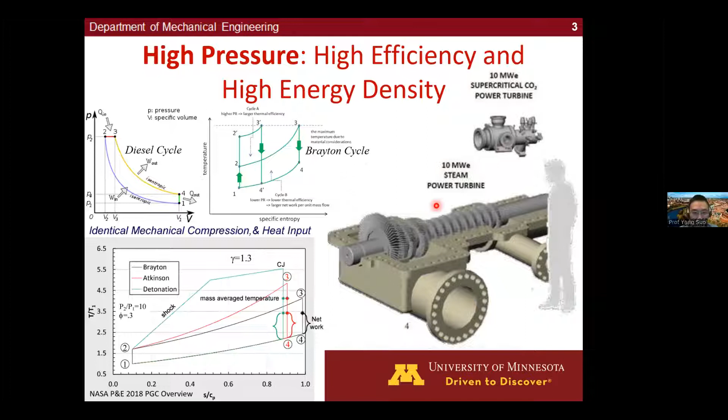As a very extreme example, that's a rocket engine. We know that a rocket engine needs a lot of power, and if you do not achieve high power density, you need a huge engine, which is very heavy, needs a lot of material, and it's impossible to push it up to space. So all rocket engines operate at very, very high pressure, something like this.

If you go higher, following the boundary between the liquid and gas, eventually you reach a point called the critical point. Above the critical point, you cannot tell the difference between the liquid and gas phase. They kind of become a similar thing. This is the so-called supercritical state.

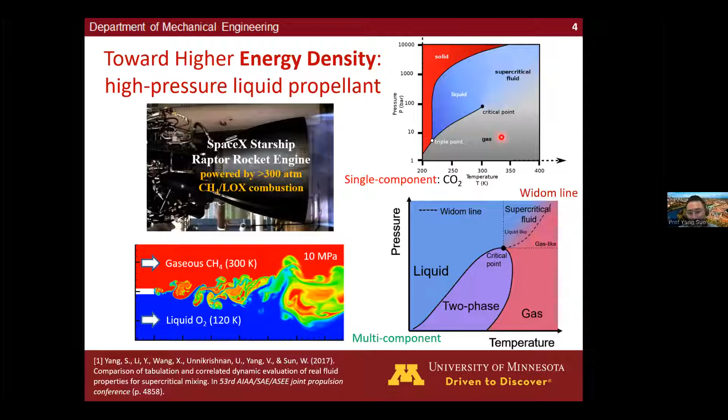Rocket engine, actually you don't need to worry too much. Rocket engine, the pressure is very, very high. Typically it's always supercritical. You don't need to worry about the transition between super and subcritical. But so we are talking about something else. The first example is the gas turbine jet engines.

So as you can imagine, you will inevitably go through a transition between supercritical and subcritical because you mix these two together. And if you want to really accurately simulate such a thing, you need one framework which can handle all the thermodynamic regions, not just say I can only handle supercritical or I can only handle subcritical. That's not okay. You need to handle all of them together in one framework.

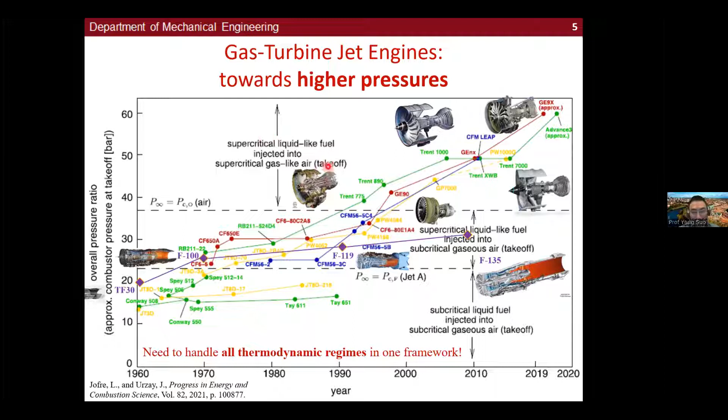If you look at the commercial one, this is a supercritical liquid-like fuel injected into supercritical gas-like air. Looks similar to rocket engine. Maybe we don't need to worry about the subcritical or transition. Everything looks like it's just in the supercritical region. But is that the case?

So I give you an example. This is not exactly the composition in the jet engine, but just an easy example for you. When you mix two supercritical fluids together, will the mixture still be supercritical? The answer is not necessarily. You might go back to subcritical again.

The reason is the true critical point could be much higher than each single component. And so when you mix them together, you raise the critical point, and suddenly your condition becomes subcritical and in the two-phase zone. And that can give you the so-called phase separation.

The most important observation I want to say here is a subcritical two-phase zone can be mistakenly recognized as a supercritical state if you use the traditional approach. What is the traditional approach? I mean the traditional approach for supercritical fluids, that's the so-called dense fluid method. Dense fluid method, basically the only thing you need to do is change the equation of state, change the ideal equation of state by the real fluid equation of state, and also change the transport property by the corresponding real fluid one.

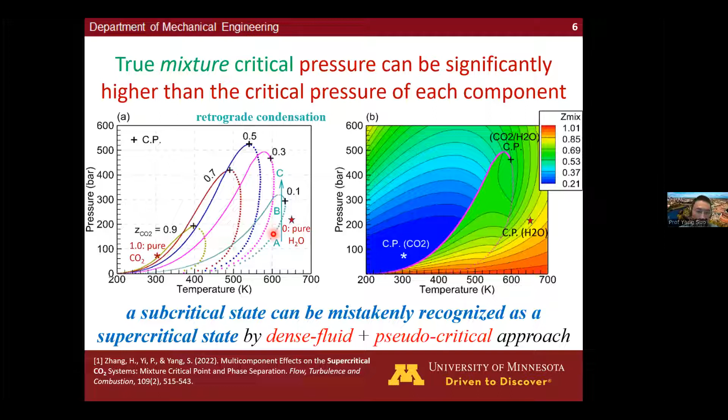And in those formulations, you will need a critical point to evaluate many functions. In the traditional method, what people do is the so-called pseudo-critical point, which is a simple kind of linear model to predict the mixture critical point. For example, if you use a linear model, the mixture critical point you will predict is here. The true one is here. So you can see it's very different. So we need this; this is one example.

The other example that may be interesting to many of you is the liquid fueled RDE.

This is actually an even better example, with more transcritical phase change. The reason is the residence time is extremely short because the detonation wave is extremely fast. Even though detonation gives you very high temperature in the chamber, the time is so short, not enough for the droplet to fully evaporate. So you'll have detonation wave collide with the shock. In the later example I'll show you, it's not just the shock that will collide with the droplet - the shock will not completely destroy the droplet or fully evaporate them. Very likely the droplet can survive to the reaction zone, and if that's the case, all these things can also be coupled with the reaction as well.

Another reason I said liquid fuel RDE might be an even better example is it has extremely large pressure and temperature variation. For example, this is recent news I heard from some friends doing MD - they indicated that the detonation triple point might have extremely high temperature, like 9,000 K and 2,000 bar. On the other hand, many regions of the chamber have very low pressure, very low temperature, relatively low temperature near the injection.

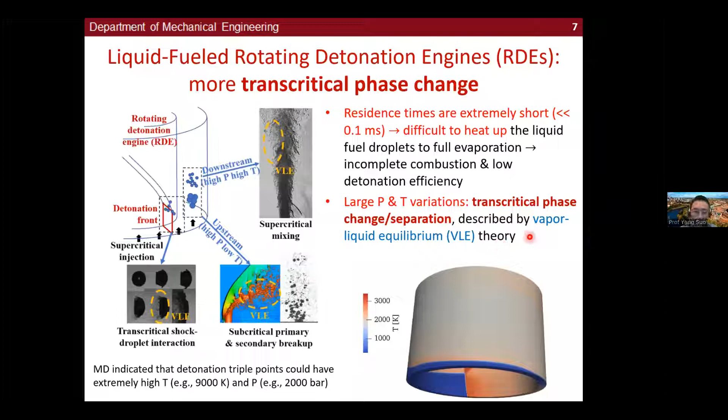So what is VLE? VLE is the foundation of everything we talk about with high pressure phase change, and the most fundamental VLE solver is the so-called TPn flash. How does this name come from? TPn flash is: you have a given temperature T, a given pressure P, and a given composition N. If all these are given, you can calculate the equilibrium phase composition.

How to calculate that? First, we rely on the real fluid equation of state, but we do this for each phase - we do not lump together the EOS for a mixture, we do this for each phase. We use the Peng-Robinson EOS. Based on this EOS, we can derive a very long formula for fugacity, and you can find that formula in our paper.

Fugacity and the fugacity equation is essentially the so-called VLE, vapor-liquid equilibrium. You can look at how the fugacity equation looks - very simple, right? Basically, for each component, its liquid phase fugacity should be balanced by its gas phase fugacity. That's essentially vapor-liquid equilibrium by its naming.

How to understand that? Fugacity - some of you may be familiar with it, some not. You can consider it as an effective partial pressure. When you have ideal gas, this is exactly partial pressure, but when you have a real fluid, it's an effective partial pressure. This basically says that the effective partial pressure of the two phases balances each other for each component. Fugacity can also be understood as a measurement of chemical potential and Gibbs free energy.

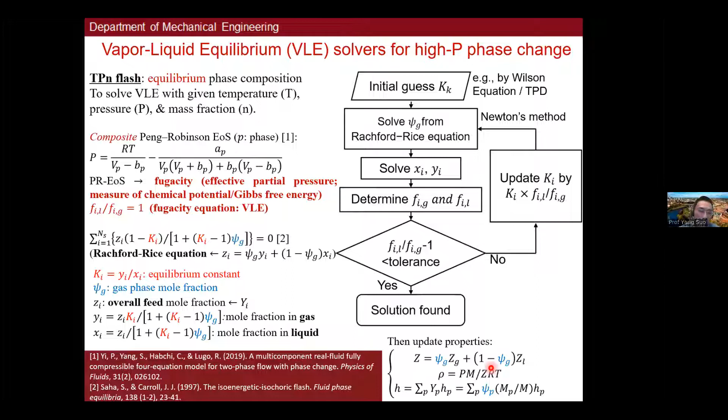So a natural question people have is - the series name is VLE, it has the name equilibrium, but is the equilibrium assumption okay?

CFD cannot tell you the answer, so we need to look into MD. I learned this figure from Professor Li Qiao's paper from Purdue. You can see the non-equilibrium process basically covers this, for example, the disappearance of surface tension and the transition for evaporation.

In such conditions, it's typically 1 nanosecond or several nanoseconds, much smaller than most CFD time step sizes you will use. For this reason, the non-equilibrium effect is negligible, and the VLE should be valid. As a result, the phase change is dominated by the slower diffusion process. This is also the case for the low pressure phase change model we discussed.

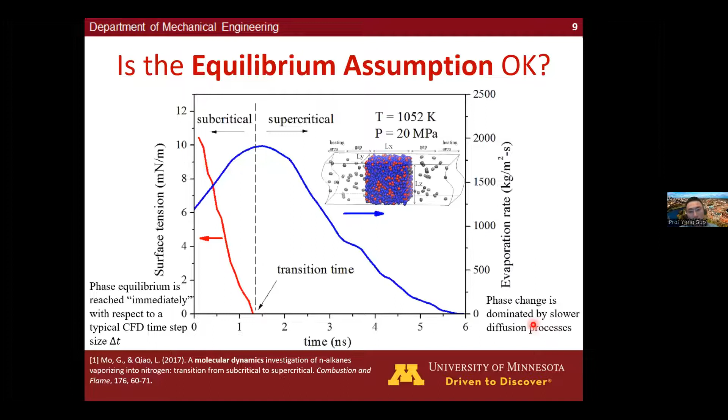Okay, so now we have the solver. Let's look at some examples, and we can use the TPN flash to predict the phase diagram for many mixtures. Here is an example adding a small amount of water to a CO2-methane mixture to mimic the SCO2 system. When you only have CO2 and methane, the critical pressure will be less than 100 bar. But if you add only 1%, you see how much the critical pressure is pushed up, and you can move inside the operating condition of the SCO2 system. If you add even more, you have a lot of overlapping, lots of two-phase zone and phase separation.

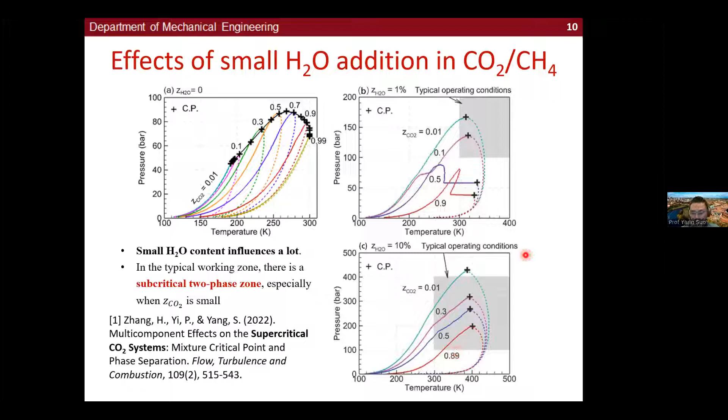We know that theoretically all the thermodynamic and transport properties are a function of the critical point, so getting a true critical point should be very important. But let's take a look at exactly how important they are. Here I use CP as an example. You see this one with VLE, this one without VLE. In certain regions, yes, it probably doesn't matter—that's why a lot of papers in the literature use the traditional way and it's still okay. But near the critical point, near the dome region, you can see they are very different.

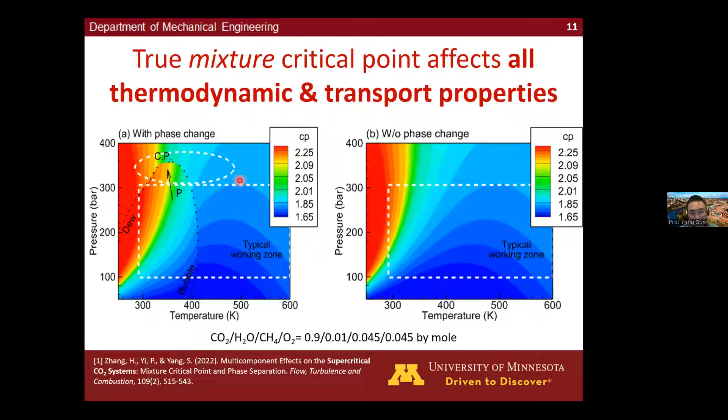Now I want to introduce a second VLE solver, which is HPN flash. TPN flash, which we already introduced, is the foundation of all VLE solvers—all other VLE solvers are essentially built upon them. HPN flash, by its name, is given enthalpy, pressure, and composition, rather than given temperature, pressure, and composition. That's why it's called HPN.

How to solve HPN flash is essentially to solve TPN flash, but you don't have T fixed, so you guess a T, solve TPN flash, and then check whether the results match your given enthalpy. If not, you update the T, and so on. Eventually you get the equilibrium solution for HPN. Roughly speaking, it's like that.

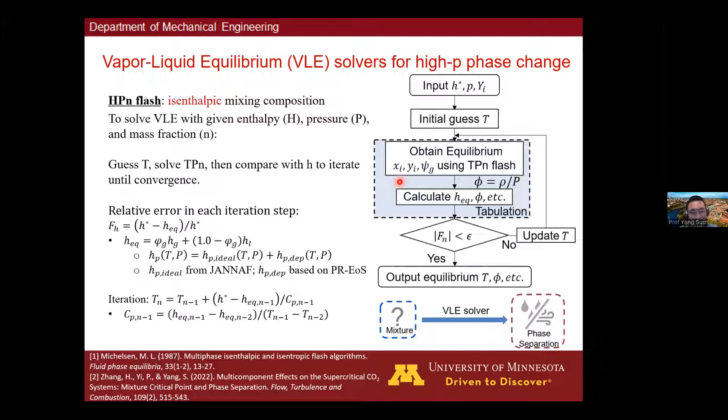Why do we need so many different VLE solvers? The reason is we're not just interested in thermodynamics—we're interested in CFD. This is a development we did based on the rhoPimpleFoam. It's a low Mach solver, but it has a transonic extension to allow it to simulate transonic conditions as well.

In a typical CFD solver, what you solve is the energy equation or enthalpy equation, rather than temperature—temperature is not what you directly get. So naturally, you need HPN flash rather than TPN flash. You give the enthalpy or energy, and let the HPN flash tell you what the temperature should be. TPN flash is used as a part of the HPN flash, so you can see there are many loops in the solver.

I want to emphasize that the CFD solver based on HPN flash doesn't mean enthalpy, doesn't mean isenthalpic. Isenthalpic is when this is fixed, but we use HPN simply because we solve the energy or enthalpy equation—we know the value, and then use HPN to provide the local instantaneous thermodynamics. It doesn't mean we enforce the process to be constant enthalpy. That's something many people get confused about, even reviewers, so I want to remind you here.

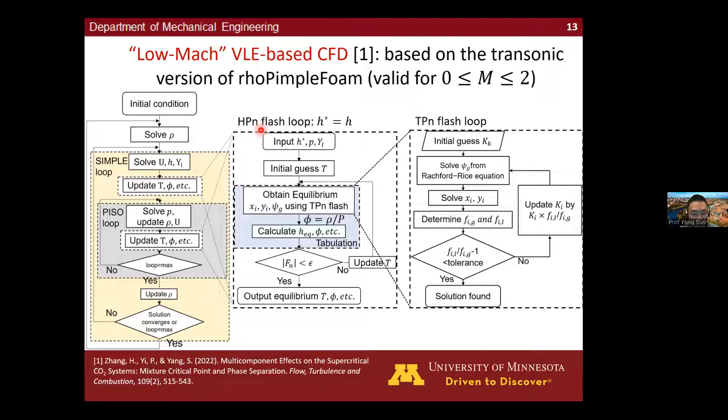Now we can see some examples. We use this CFD solver first to test an SCO2 shock tube. You have a shock wave going to the right-hand side and an expansion wave going to the left-hand side. What we found is for the shock wave part, the VLE didn't make much difference, but for the expansion wave side, you can see a clear difference between with and without VLE.

Okay, if you look at this, how much phase change do we have? It's just from 1 to about 10%, or a little bit more than that. We don't have a lot of phase change, just a little bit, but this already makes the density very different. You see the density with and without VLE become very different.

This is essentially because we have a partial condensation after the expansion wave. You trigger the phase change, you trigger the latent heat, so it also changes the temperature. So the point I want to make here is even a very small amount of phase change can have significant impact on the density or other quantities. So it's not negligible at all.

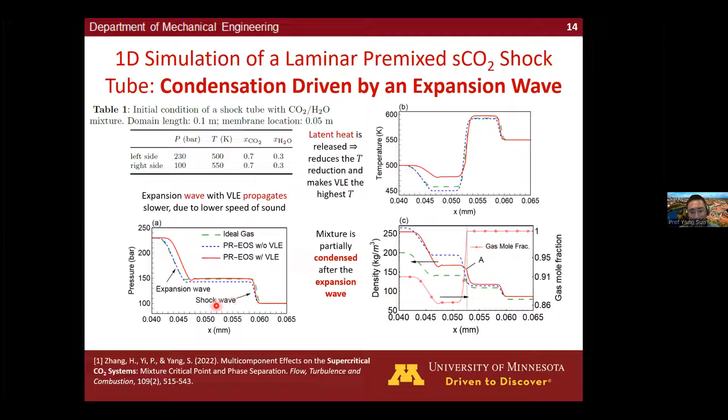Okay, and then we try to mimic the real SCO₂ system, so we do this jet-in-crossflow simulation. Essentially in the SCO₂ system, you have CO2 with a little bit of impurity water coming in, and you can inject methane or oxygen depending on which injector you are talking about.

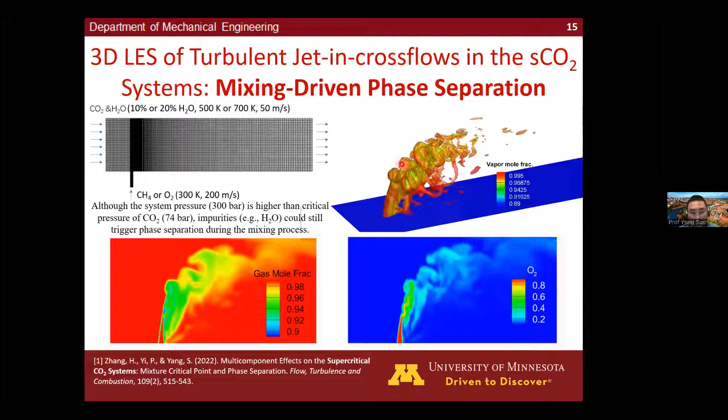And we can do a parametric study. The major effect is: the lower the temperature, the more phase separation you have. Phase separation - why I want to say phase separation here - because the inflow is supercritical gas-like, and the injection is also gas. But when they mix together, they trigger condensation, because you raise the critical point, you have the two-phase zone, you have phase separation. The lower the temperature, the more phase separation happens. The higher the temperature, the less phase separation happens.

And it also depends on which species you inject. Oxygen has a higher molecular weight, so the jet bends less, and it also has more breakup due to its higher density.

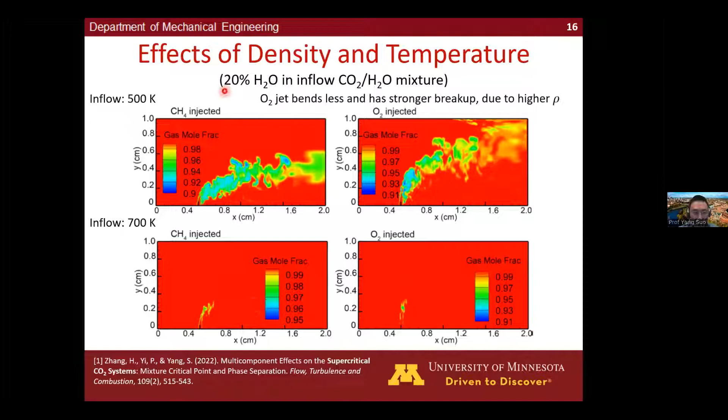If you compare this figure with the last slide, you can see this is 20% water in the composition, this is 10%. When you have less water in the composition, you have less phase separation. That's as expected. The different amount of water in the background flow can actually change your phase boundary, such that for the same trajectory, some give you phase separation, some does not, depending on the phase boundary. Here is the dew line.

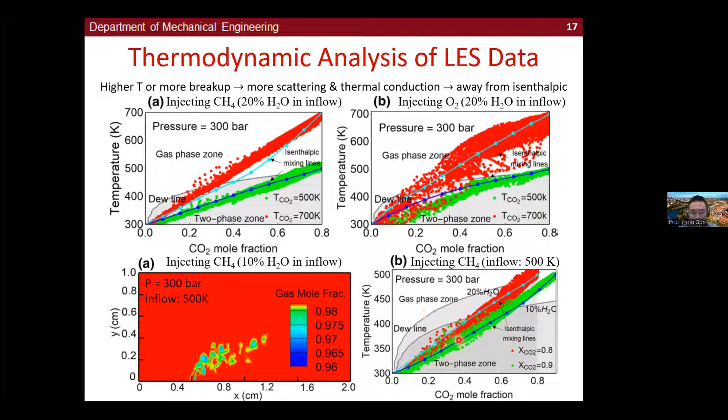So that's the example about the SCO₂ system.

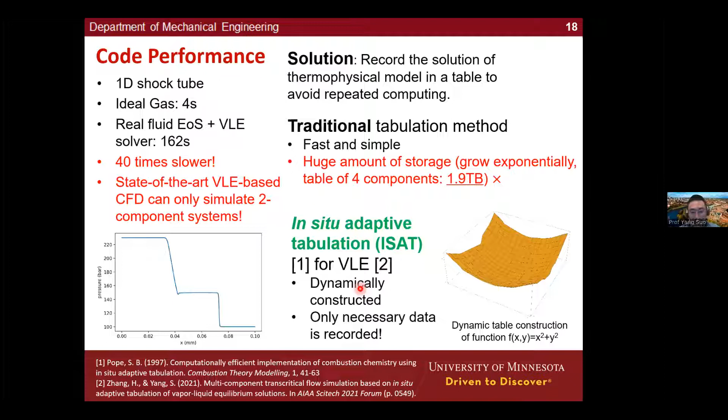So a natural idea - because we're from the combustion community, we are very familiar with the ISAT idea, which people use to do finite rate chemistry. So why not also apply it for VLE calculation? We can dynamically construct some table, and we only do calculation when necessary. We want to avoid all the repeated calculation.

So we apply ISAT to the PHN flash solution, and in ISAT you have a mapping, and the X in for the VLE solution is pressure, enthalpy, and composition - that's PHN - and the output is temperature, density, and phase mole fraction. And in the ISAT, a record in the table needs to have X0, Y0, and a gradient. The gradient you can evaluate numerically, and you can also evaluate it analytically.

We learned the derivation from Suresh Menon's group. They did a lot of derivation for how to do analytic evaluation for the gradients in the VLE solution.

In the VLE, in the ISAT approach, you basically build a so-called ellipsoid, or region of accuracy, and any point that falls into this region, you can do linear interpolation to get the value rather than doing an on-the-fly calculation. You store all the data in a binary tree like this.

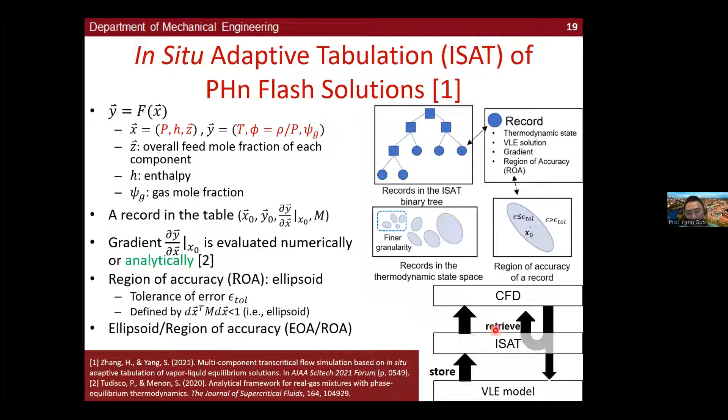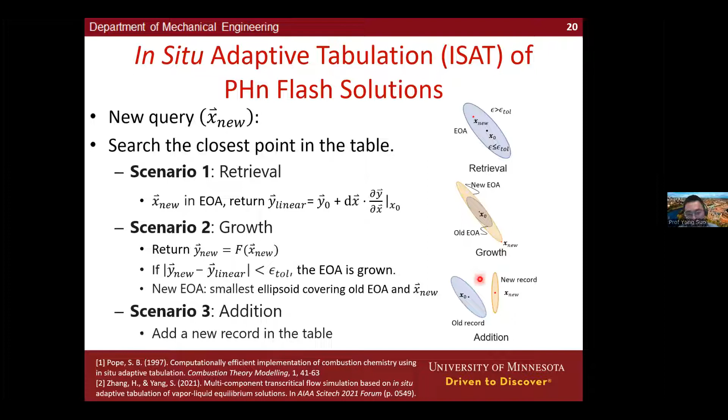This is more information about ISAT, some of you may already be familiar with it. If a new point falls directly into the region of accuracy, you can do linear interpolation. If a new point is outside it, but the accuracy of linear interpolation is still good, you can grow your ellipsoid. If neither is the case, you need another VLE calculation, so you add another ellipsoid. That's how it works.

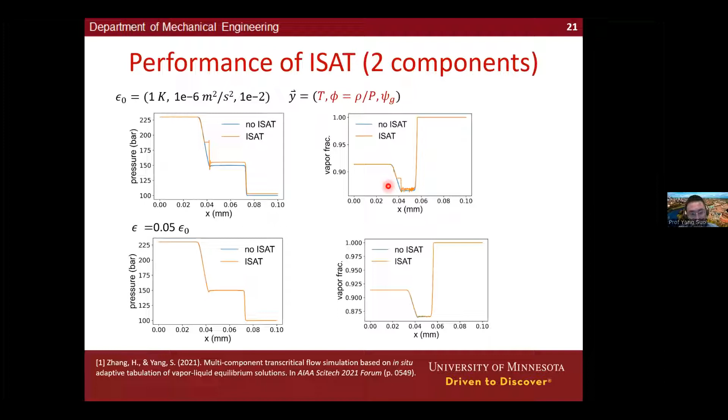The threshold matters. Here we show some examples. If you have too large a threshold, you will introduce errors, but if it's small enough, you will get very accurate results. So you need to consider both acceptable accuracy and fast enough speed.

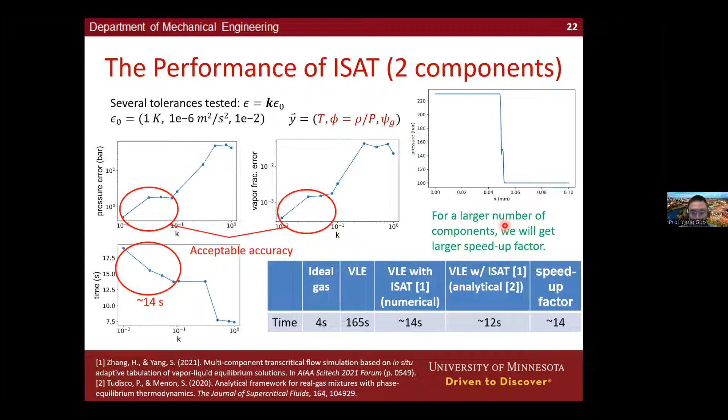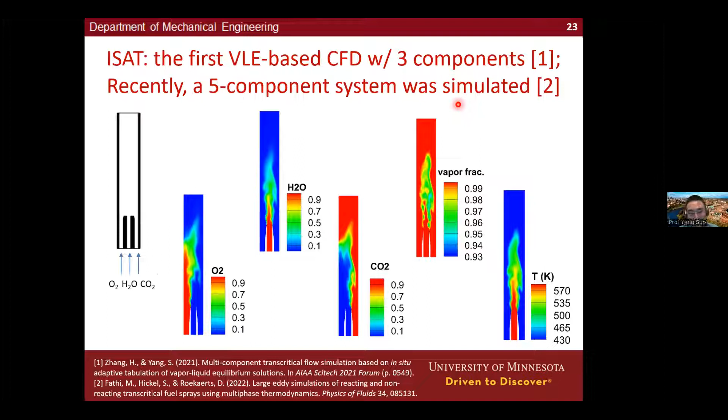Here is the example case we did, with 3 components. I think this is the very first 3-component case, since we never saw it in the literature, and we can do it pretty fast. I want to mention recently another paper was published in Physics of Fluids where they did 5 components, so we are not the only ones doing more than 2 components now - there are other groups too.

All the previous results were from the low Mach solver. For other applications like detonation, you can have more than Mach 5, and you definitely cannot use that solver. So recently we also coupled the VLE with a fully compressible solver based on the rhoCentralFoam, which uses the central upwind scheme.

In addition to coupling the VLE, another issue is that for a fully compressible solver, if you do supercritical or transcritical flow, you will have spurious pressure oscillations. There's already some method to handle that, for example this double flux model, so we coded this up together with the VLE.

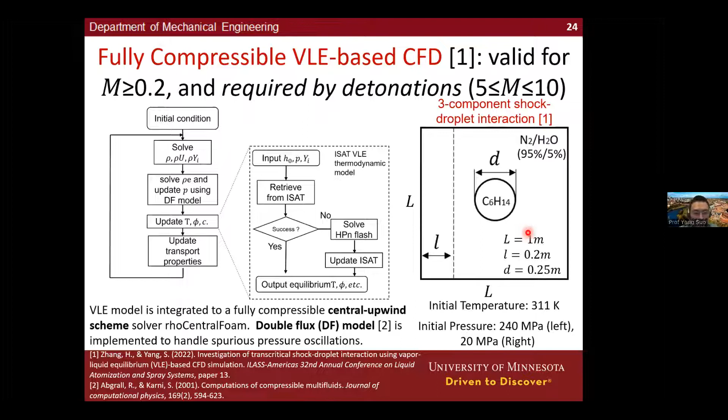An example case we are doing now is not yet detonation - we just want to look into a simple case first: a shock-droplet interaction, like this. This is the simple case we simulated very recently.

When the shock collides with the droplet, you raise the pressure and push the condition from subcritical to supercritical. It's not directly visible from just the vapor fraction, but you can probe the data here and map that into the thermodynamic regime diagram to tell whether it's supercritical or subcritical.

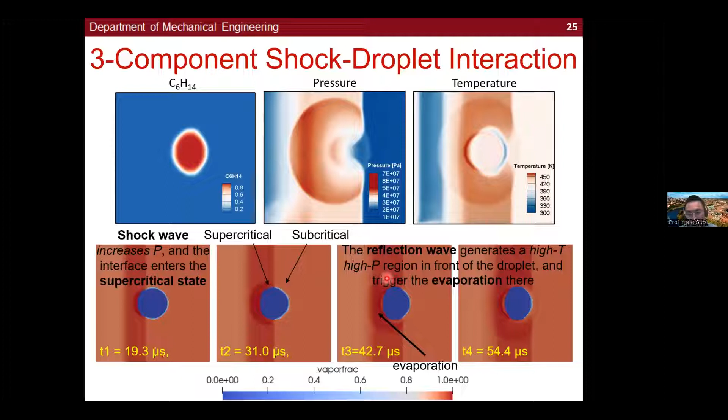Another thing is you have a reflection wave, which triggers a high temperature, high pressure region here, and this is the major region for evaporation. We tried to see how much evaporation actually happened.

A simple way to do that is you do a VLE solution, then another CFD without VLE, and you can see the difference is only 6%. That means the shock wave is probably too fast for significant phase change - it collides, then moves away too fast, so phase change is a bit slower, and only this amount happened.

But that's not bad news scientifically - that means very likely, if it's a detonation, the droplet is likely to reach the reaction zone, meaning you'll have VLE interaction directly with the reaction zone. Scientifically that's more interesting, and we do plan to investigate that.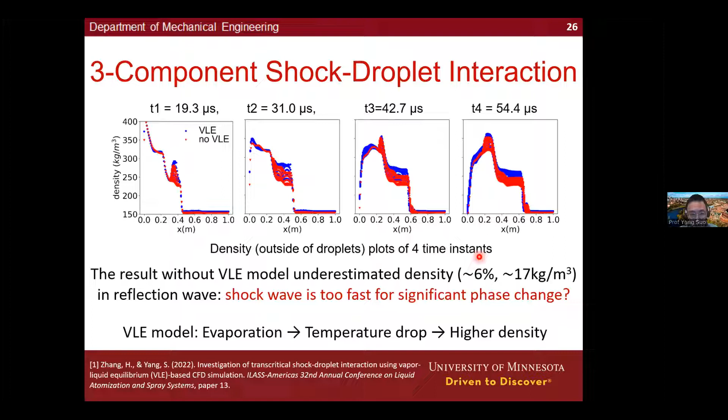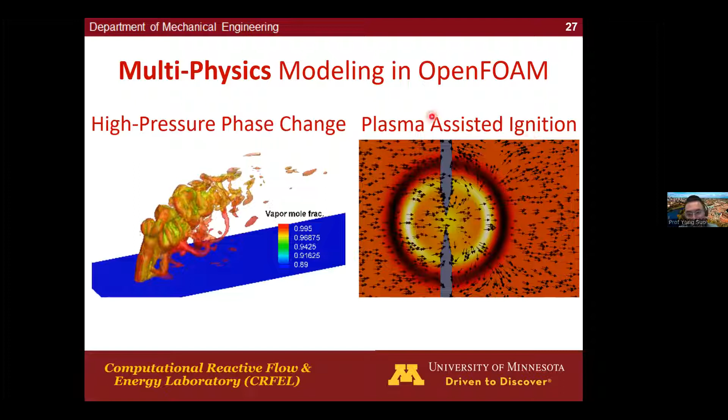That's the first half of my talk about high pressure phase change. To save time, let's go to the next topic about plasma assisted ignition.

The first recent project we did is about plasma assisted ammonia combustion. Why ammonia? Because it's carbon free and likely to give clean combustion. Ammonia can be renewable, and it's indeed carbon free.

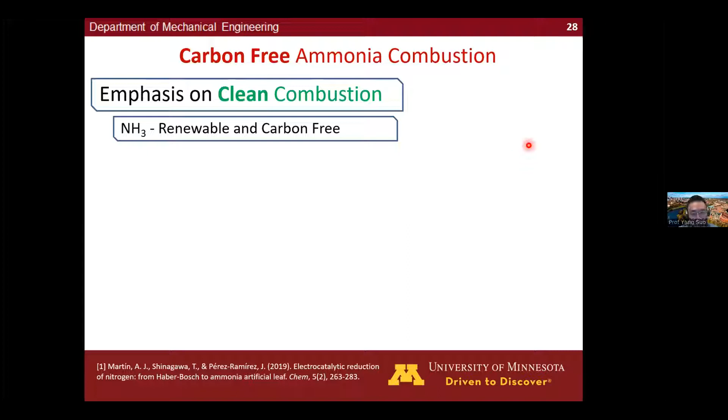Traditional ammonia synthesis is by the Haber-Bosch process, which is not renewable and requires a lot of machinery - that's the major way nowadays. But today a lot of new methods are coming out; you can even just use air and water to synthesize ammonia using renewable energy like solar or wind.

The energy density of ammonia is pretty nice, similar to gasoline - it's like half, not an order of magnitude difference. A battery is an order of magnitude lower than gasoline, but ammonia is pretty nice. It's an effective hydrogen carrier, and it's safer and easier to store or transport than hydrogen.

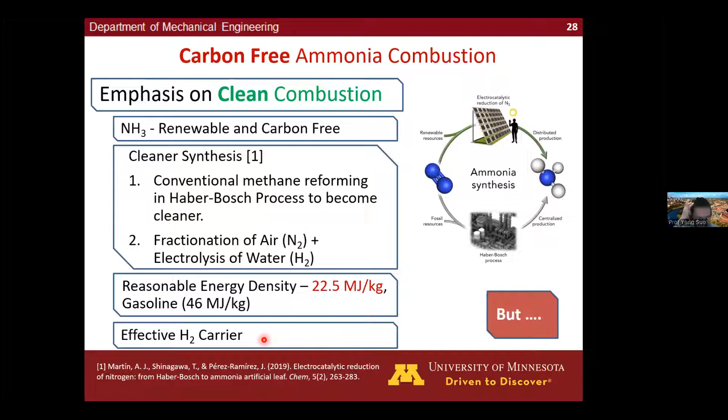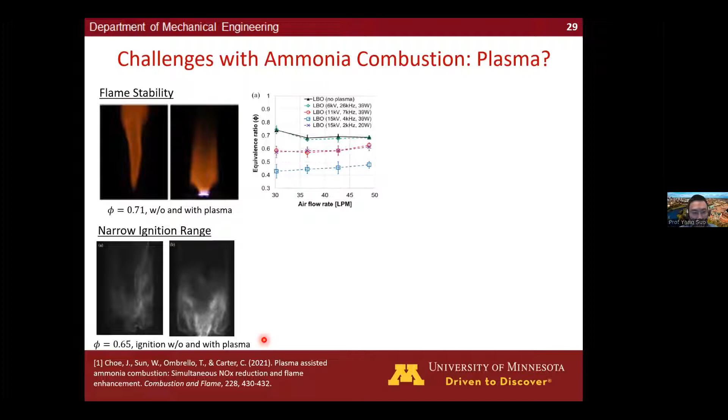But ammonia has many disadvantages. Its flame stability is very bad, and you can very easily get lean blowout. It has a very narrow ignition range, and it's very hard to ignite ammonia, and it gives you a lot of NOx.

Recently, Professor Wenting Sun's group at Georgia Tech did this experiment. They basically added plasma to a swirling combustor. They found that they can extend the lean blowout limit for ammonia flame, and they can also make ignition easier.

And most surprisingly, they found even NOx can get reduced by plasma. That's a surprise. Why is it a surprise? Because normally for other fuels, plasma will increase NOx by enhancing the oxidation of nitrogen. But for ammonia, somehow it reduces NOx.

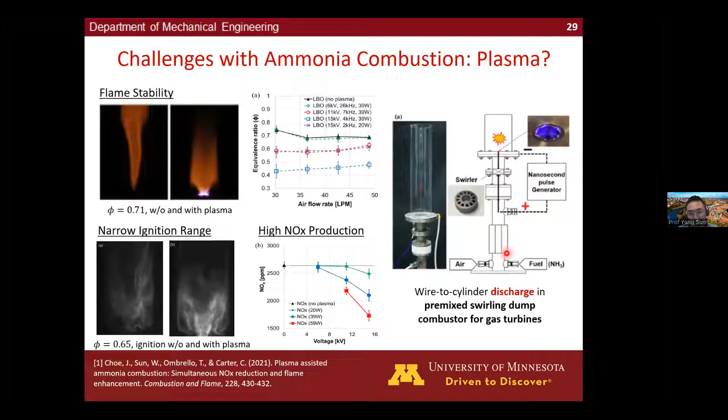The thing is, experiments can observe it, but cannot tell you why. So the job comes to my group. We will eventually simulate their device, but to do a parametric study, let's start with a 0D simulation.

The 0D simulation is very simple. Basically we couple ZDPlasKin to simulate the nanosecond discharge and use ChemKin to simulate the gap between the discharge pulses. This is exactly the same as what Professor Yiguang Ju's group did before. The ChemKin part everyone's familiar with.

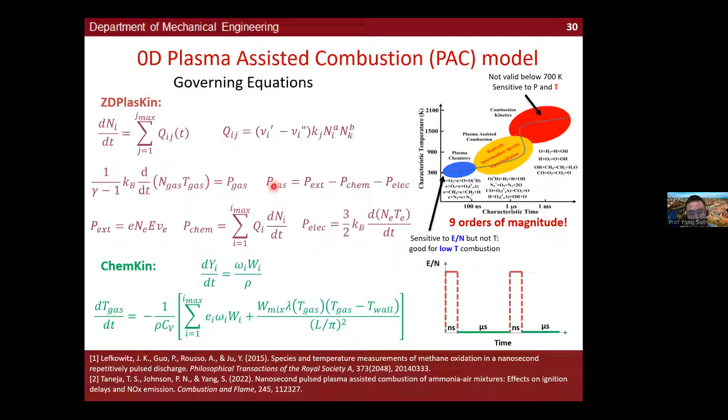The ZDPlasKin part still has species equations, but for plasma species, and this is the energy equation. You want to know how much heating this plasma gives you. So you have the externally enforced power, and you want to calculate how much of this goes into the plasma chemistry, how much goes to accelerate electrons, and the remaining can become heat. That's how ZDPlasKin works.

We use this tool to do a parametric study for plasma-assisted ammonia combustion, and indeed we find the same observation as the experiment: faster ignition and lower NOx. Faster ignition is as expected - we get an order of magnitude faster ignition. This was one of the original motivations for PAC, to make scramjet ignition easy.

One interesting thing I want to say here is plasma is not the only way to give fast ignition. If you do the same high frequency pulse but using laser, you can give pretty similar fast ignition. But traditional spark ignition will give you much, much slower ignition.

On the NOx side, the story is different. Only plasma can reduce NOx. Laser ignition gives exactly the same amount of NOx as spark ignition - no benefit.

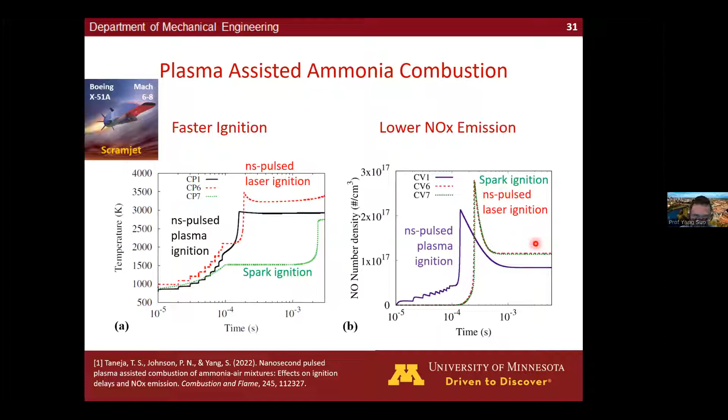Simulation can give us all the information, so we try to understand what's going on. For ignition, it's quite easy to understand, just like hydrocarbons. Plasma can give you much faster generation of OH radicals. Laser can do much faster than spark, but is much slower than plasma, because in laser, all the energy goes to thermal energy, while in plasma, a significant portion goes to chemistry. O1D is a very active, excited state of the O radical.

Spark ignition will not give you any O1D. Laser can give you a little bit, but plasma is the major one that can give you O1D. The reaction is electron plus oxygen gives O plus O1D. O radicals perform similar to OH, as you can see. So it's very easy to understand why plasma gives faster ignition and why laser can also give faster ignition - both are much faster than spark.

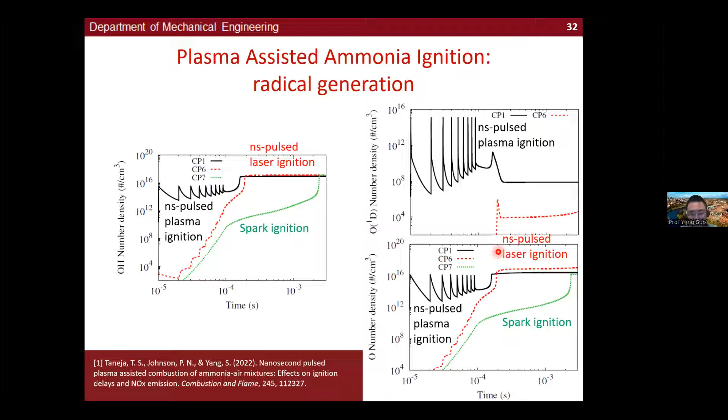If we look at the path flux diagram, we can see one big difference: for plasma, the major generation of OH comes from O1D, while for laser and spark, it all comes from O. The reason is the major reaction, electron plus O2 becoming O plus O1D, is not there in laser or spark because there's no electron in these two.

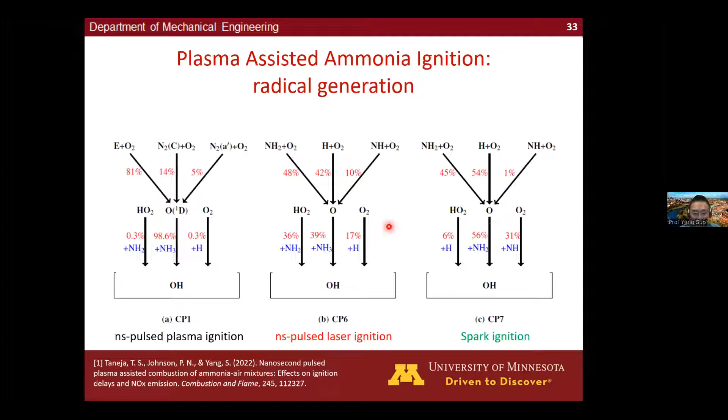Now let's look at NOx reduction. Why do we have NOx reduction? During the pulse, the path flux analysis looks like this. You can see the plasma case actually pushes everything towards nitrogen. So plasma essentially reforms NH3 to NH2 and eventually to nitrogen and hydrogen. Laser and spark mainly still push it towards NOx.

In addition, laser and spark are actually not very active, not very reactive during the pulse. So what you can see is the total amount of ammonia is almost constant for laser and spark, but drops significantly for plasma, because plasma reforms it into nitrogen and hydrogen.

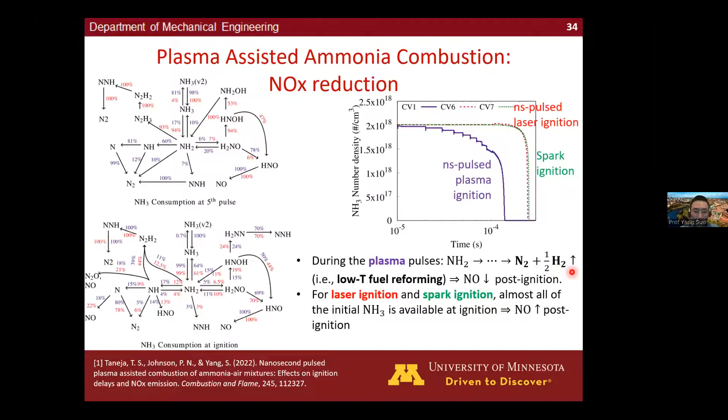So when you get ignition, the plasma case already has a very limited amount of ammonia, so the amount that can go to NOx becomes limited. But for laser and spark, they have almost the same amount as the initial state, which gives you a lot of NOx. If you look at the ignition, actually all three are very similar, not much big difference. The major difference is during the pulse, plasma already consumes a lot of ammonia to reform it into nitrogen and hydrogen.

Okay, so that's about ammonia, and we did a 0D parametric study. But this is an OpenFOAM webinar, so we are more interested in CFD, we want to go towards CFD. But it's very hard to do CFD for PAC because we have coupled physics, and more importantly, we have a very wide range of timescales.

The discharge and plasma timescale can be 10 to minus 13 to 10 to minus 8 seconds, while combustion kinetics and turbulent flow is normally 10 to minus 6 to 10 to minus 4. So this is like 9 orders of magnitude difference.

Okay, so we want more physics, we also want affordable CFD, so these two contradict with each other. There are several solutions. First, we want to do a very detailed plasma part but ignore everything else, so it's the 0D solver. That's what we did for the ammonia case.

The other way is we want a little bit of dimension and fluid, so we can make it 1D. That's my PhD work at Georgia Tech. You can also extend it to 2D to do some laminar flow discharge. There's some paper about it, and it's very expensive - you cannot do 3D, you cannot do turbulent case. 2D laminar is the best you can do.

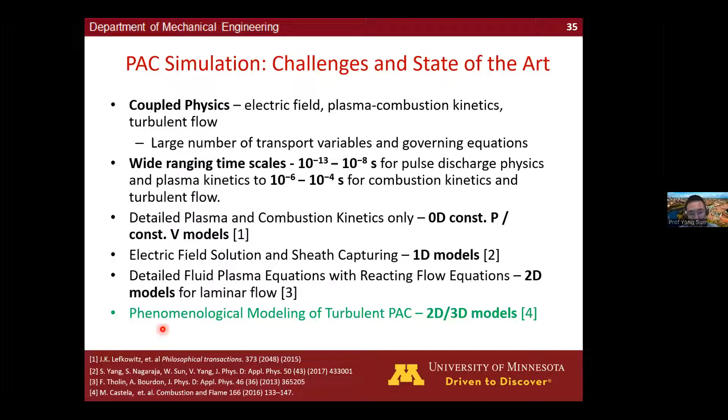If you want to do 3D and turbulence, currently the only feasible way is the so-called phenomenological model. This phenomenological model was invented in France, at EM2C, central Paris. The basic idea is a little bit similar to the 0D model. For the input energy, you can distribute it into 3 parts: the ultra-fast dissociation of species, ultra-fast heating, and the vibrational excitation. The vibrational excitation will eventually relax to translational energy, which gives you the slow heating.

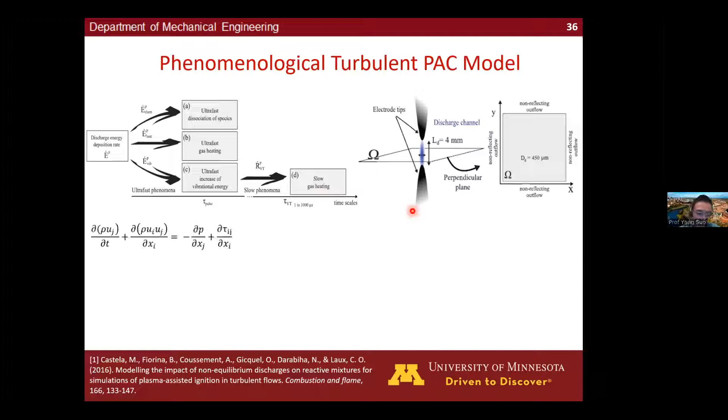Okay, so the governing equations - we still have the Navier-Stokes momentum equation, we have the energy equation, but you have more terms to represent the enthalpy change from the plasma chemistry, the fast heating, and the slow heating from the vibrational to translational relaxation. To capture this VT relaxation process, you also need to introduce vibrational energy, and this is the source - the plasma gives you vibrational excitation. This is the sink - the VT relaxation gives the sink. And of course the species equation, but you need to add the plasma term.

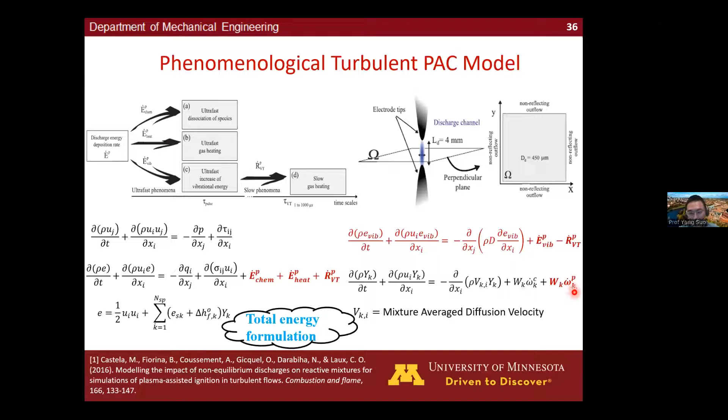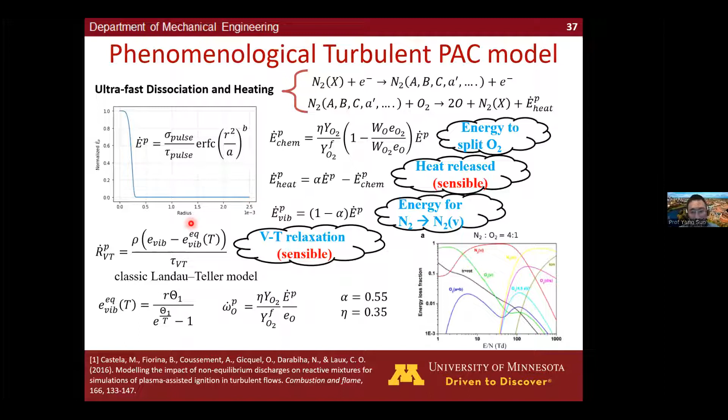Okay, so we have more details here, because of time I probably won't talk too much, but one thing I want to mention is this phenomenological model assumes a waveform for the power density. You basically need to give a power density as an input file to the code such that this phenomenological model can work. And they assume this power density function does not change with time, which later I will show is often not the case.

Okay, so we basically developed this model. The model is not invented by us, that's from EM2C, but we developed it in OpenFOAM. Just like the VLE solver, we did both the low Mach version and the fully compressible version, based on rhoPimpleFoam and rhoCentralFoam. Okay, and one thing is the molecular transport becomes important.

So the default OpenFOAM uses unity Lewis number, unity Prandtl number assumption, so we coupled Cantera to provide the detailed transport property. Cantera also gives us CVODE to handle the stiff chemistry. And by the way, our Cantera coupling is already posted on GitHub - anyone can go ahead and download and use it.

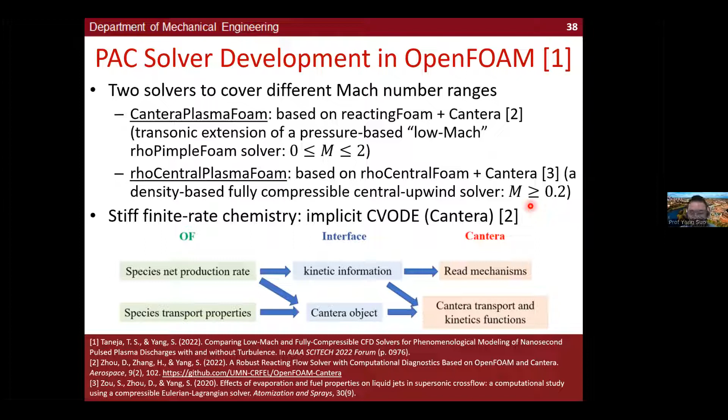So with the solver, we can simulate some interesting cases. This is a 3D ignition kernel evolution with plasma. So we have a laminar case and a turbulent case. For the turbulent case, we basically enforce isotropic homogeneous turbulence.

In the plasma ignition, if I play this video again - initially you can see a weak shock wave generated by the plasma discharge, and the shock wave will go outside, first become an acoustic wave and then go outside. You can often form this interesting toroidal shape in the laminar case.

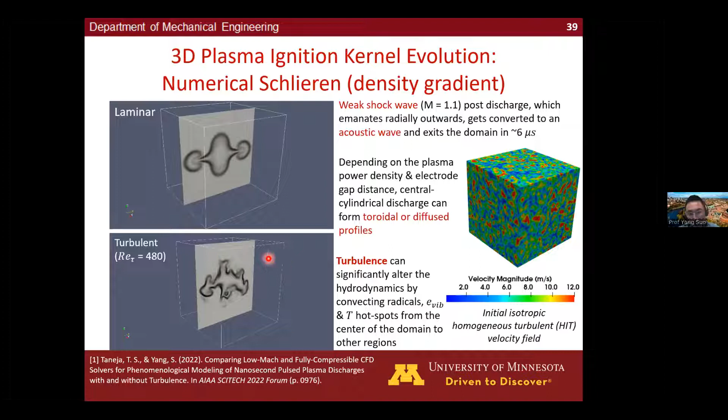When you have turbulence, turbulence will basically convect radicals and vibrational energy and the temperature hotspot away from the center of the domain to other regions. This actually is a destructive process.

As you can see in the result here, the laminar case gets a successful ignition with this toroidal shape. The turbulent case, when your turbulence intensity is high enough, with the same plasma input, you can get ignition failure. The reason is to get ignition you need focused heat and radicals all in the center of the domain, but turbulence basically pushes many of them away, giving you ignition failure.

So for practical problems, we might need a stronger plasma source, plasma input, so the energy consumption will be higher, but hopefully still relatively low compared to the traditional technology.

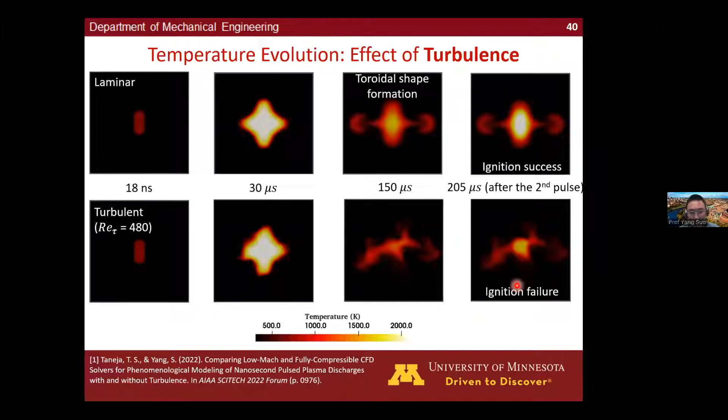For plasma ignition, a very interesting work was done by Lefkowitz and Ombrello on the effect of pulse frequency. They found that depending on the frequency, your plasma discharge pulse can have fully coupled mode, partially coupled mode, and decoupled mode. Coupling means each discharge pulse gives you some ignition kernel, and if the two pulses are close enough, the ignition kernels can couple together.

So we tried to simulate this case to get more insight and understanding. We simulated both the fully coupled case and the partially coupled case. The fully coupled case is shown here, and you can see the interaction between the plasma discharge with the preceding kernel results in a strong ignition kernel and successful ignition. You can let the simulation go further to see whether it dies out, and you can also check the heat release rate plot, which we're not showing here, to tell you whether it gives successful ignition.

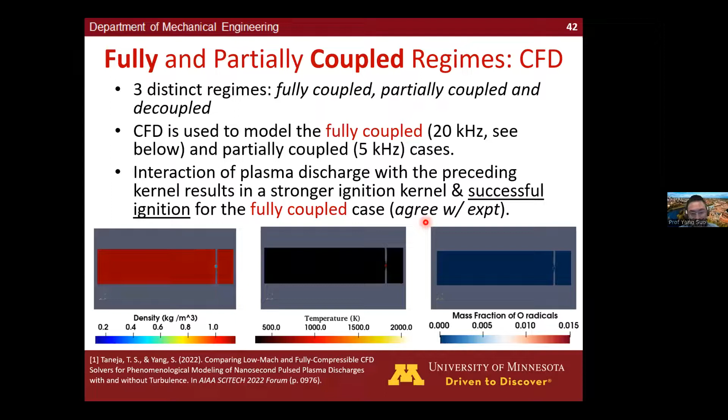Now let's see the other case, which is partially coupled. In this case, you can clearly see the difference between the two ignition kernels. They are in touch, but they are not merged like the fully coupled one. You have more volume of unburned mixture exposed to the individual kernels, but very little interaction of the new discharge with the previous kernel in terms of radicals and temperature.

For example, looking at temperature, these two kernels are already disconnected, so they cannot help each other. Eventually we get a failed ignition, as the simulation tells us, and this also agrees with the experiment.

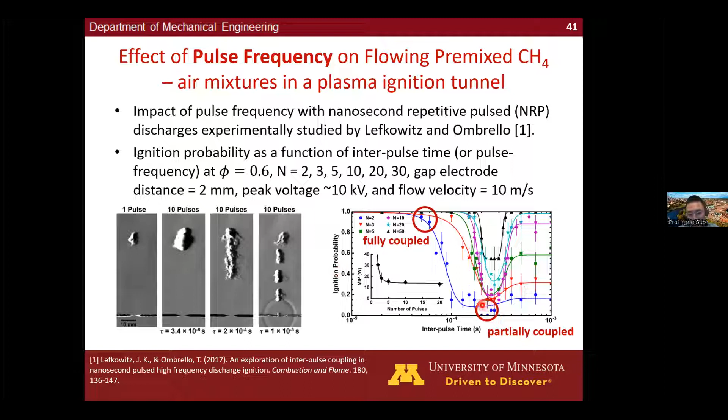If you go back to see the experimental data, the partially coupled cases here have ignition probability less than 0.2. So in most cases you should get a failure, which we indeed captured.

Okay, so that's about the phenomenological model. We also tried to improve it. The way we can do this is a more detailed plasma modeling, but we cannot do it for the full system. We assume we only need to do the detailed plasma modeling for air, so we have air chemistry and do a 2D case.

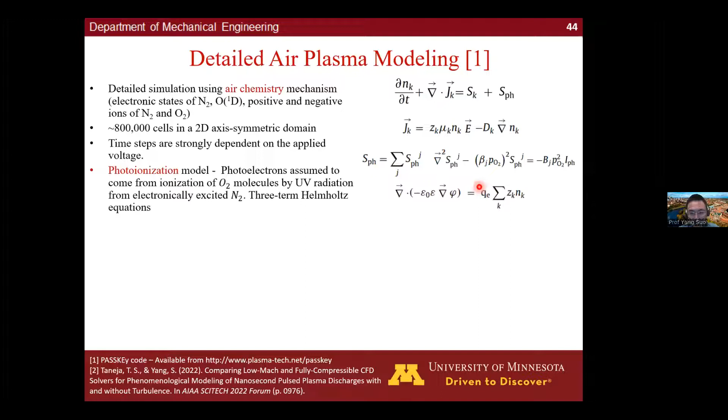We can introduce photoionization, and of course you solve the Poisson equation to get the real electric field. This is using the PASSKEy code available from this website.

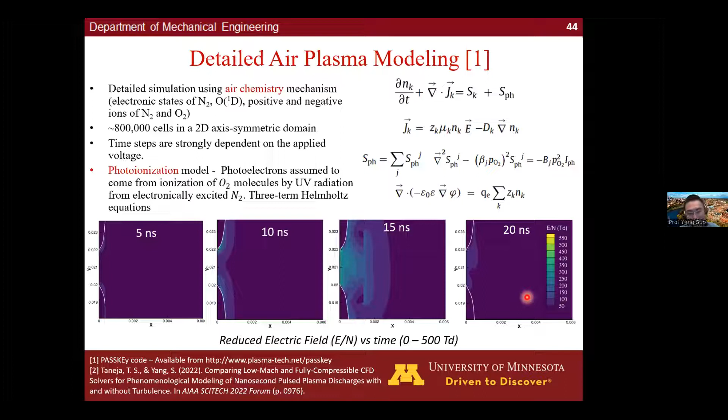What you can see is the electric field is actually not the same through time. Recall that in the phenomenological model, you need to assume the electric field and power density are always the same at any time, but that's not the case, as you can see from here.

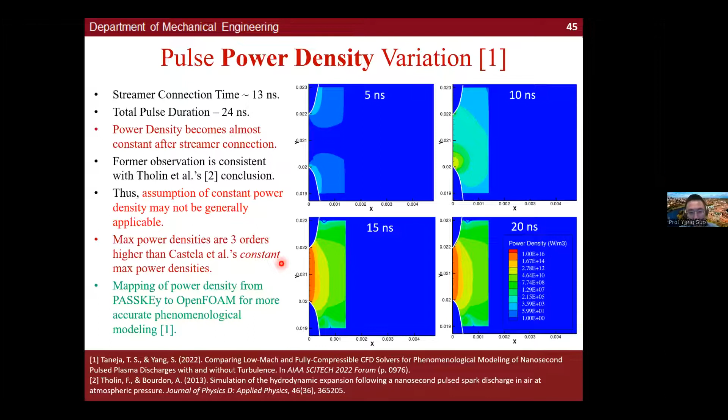So our current plan is to use PASSKEy to do a detailed 2D simulation to get the time variation of the power density, and save that as an input file to the phenomenological model. We're already doing that.

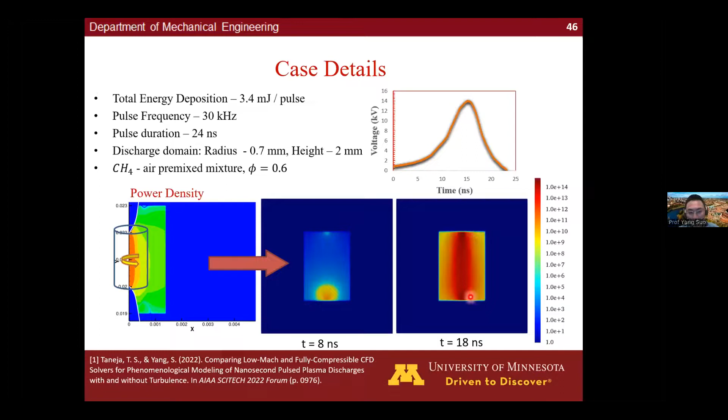So this is the PASSKEy results. You assume it's axis symmetric, you rotate it, and map it into the 3D CFD domain for the phenomenological model to use. You can see this starts from the electrode, and eventually you get a streamer connecting with each other, and then we can do the ignition simulation again.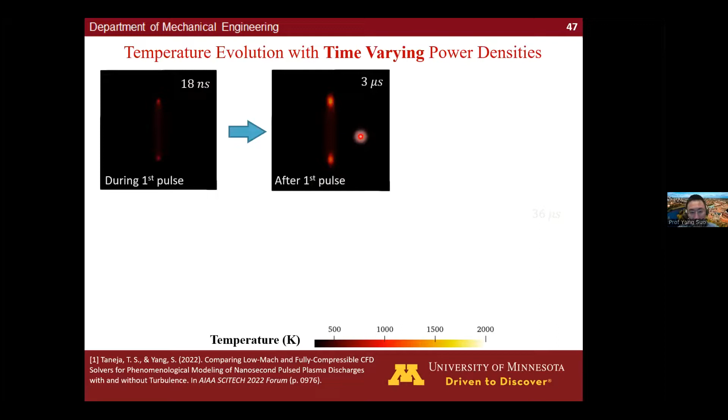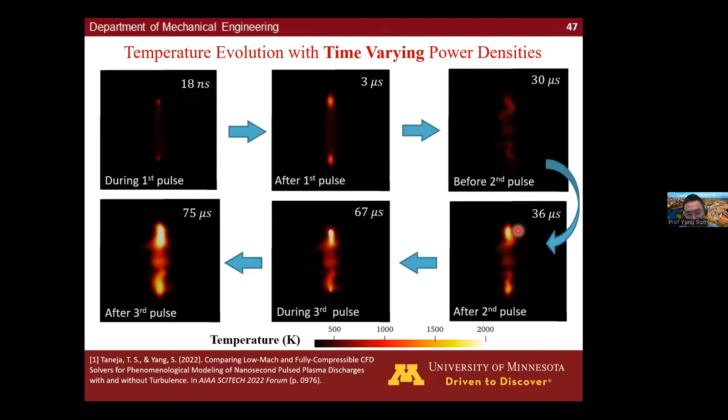You can see the ignition kernel actually starts from the electrode rather than near the center. The original phenomenological model will not capture starting from the electrode, and it can evolve like this. So you can see it's highly non-uniform, and it's very important, especially in the early phase, to capture this non-uniformity of power density and the time evolution of the power density. Okay, so that's all my talk.